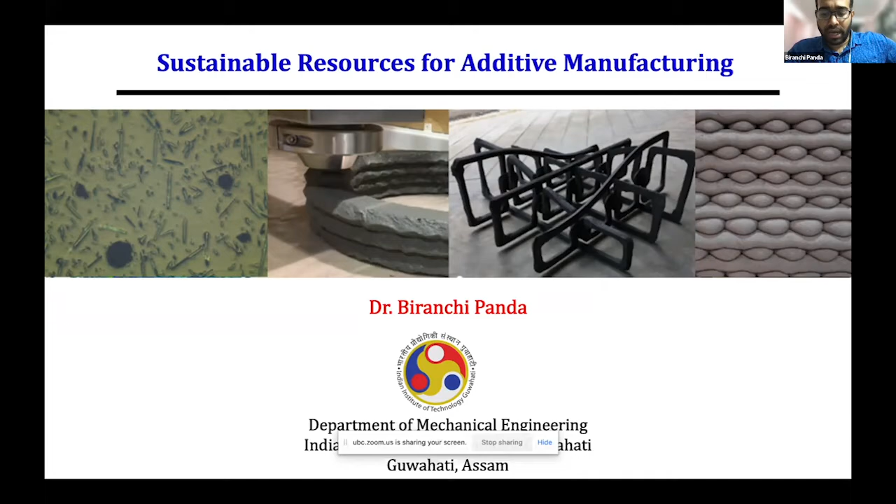Today I'm here to share some of the research activity being done at IIT Guwahati. I completed my PhD from Nanyang Technological University, Singapore, and just one year back I joined IIT Guwahati as an assistant professor. We do research on digital construction. You can see a robot printing some structures. Definitely we have much higher productivity compared to the traditional way of creating construction structures.

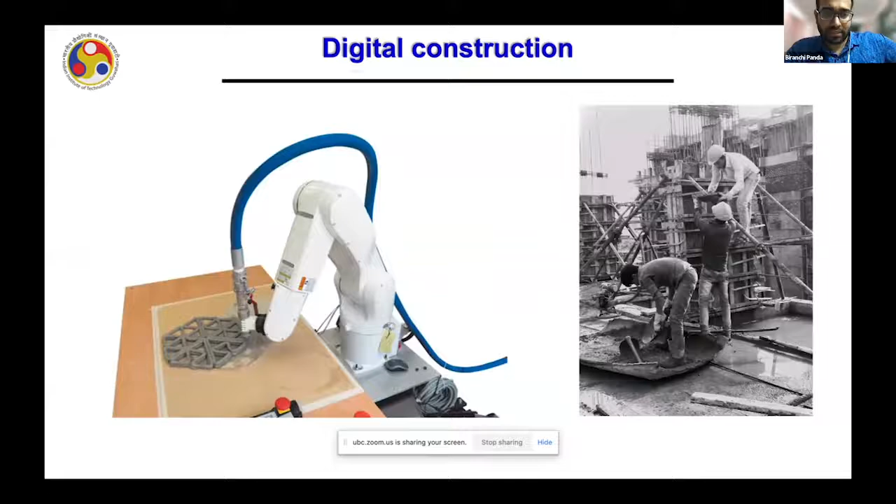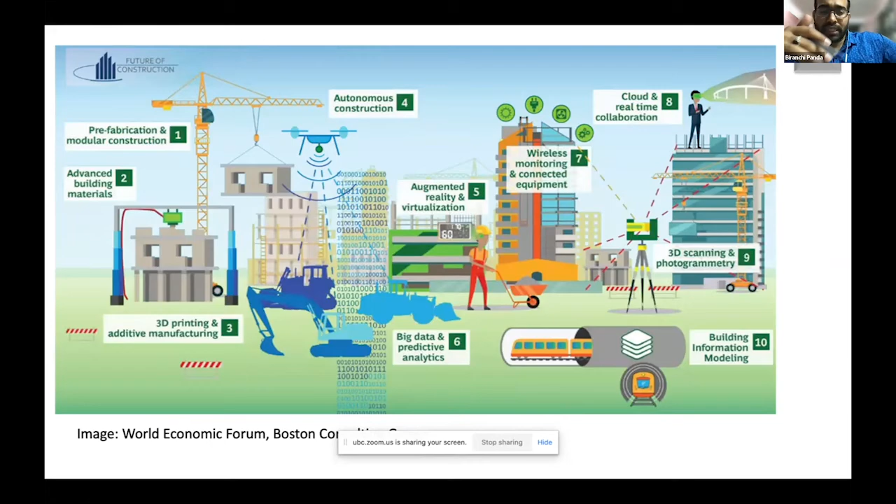In recent newspaper articles, I have seen that the World Economic Forum has also pointed out the need to automate our construction industry through various technologies like IoT and 3D printing. Different new technologies can be combined to automate our building process, so that the process can be faster and we can get more quality and robust components. There are different strategies under the umbrella of digital construction. 3D concrete printing is one technology getting a lot of attention from both academia and industry. In fact, when I joined in India, I got a lot of response from companies like JSW and JK Cement, who are very keen to invest in concrete printing projects.

When I look into concrete printing projects, I feel there is a huge need to understand the technological benefits. For me, I see the benefit in terms of design freedom. You can see an example of this kind of complicated geometry printed by a French company, XtreeE. You can imagine the degree of complexity achieved with the help of a 3D printer without the need for any mold.

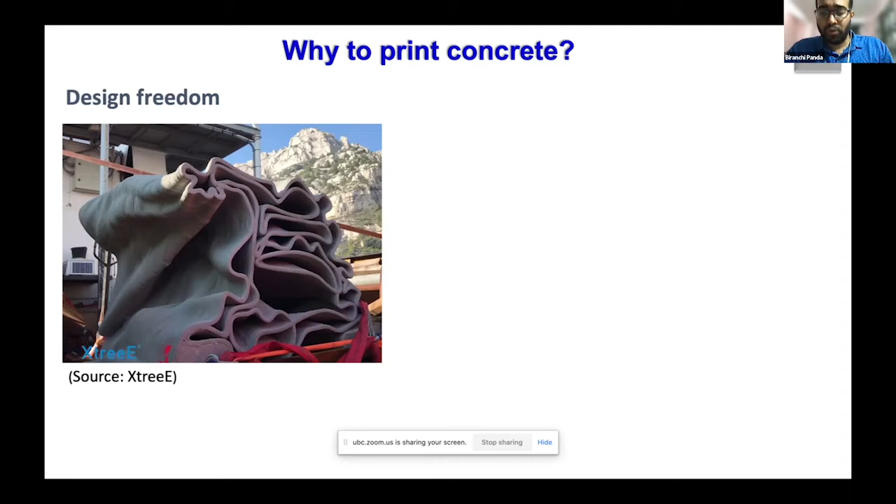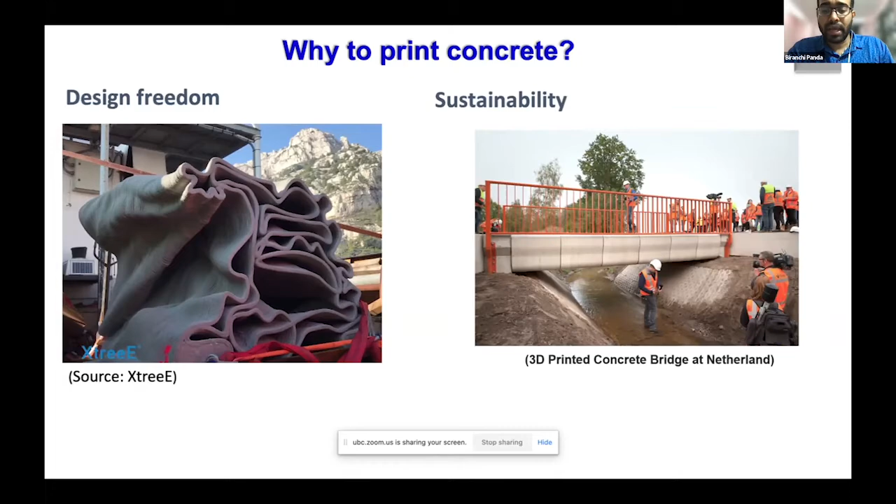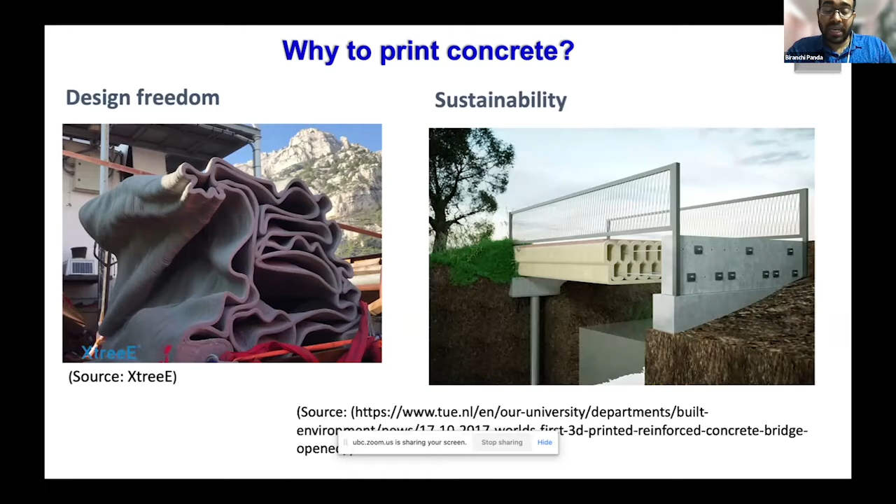Another benefit I see is sustainability. Definitely we can bring more sustainable materials to create such structures. But if you see this bridge, the entire cross-sectional area has been topologically optimized, and this work was done in the Netherlands. So through 3D printing we can also redesign our structures to minimize concrete waste, and thereby minimize the problems with the production of cement.

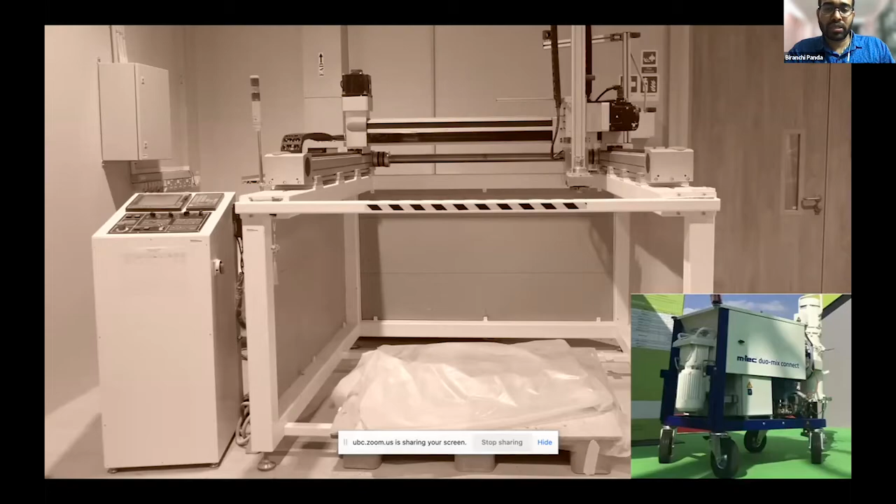So during my PhD, I was using two different types of machine. One you can see on my screen. It's more like a gantry-based system. So on the left-hand side, you can see a controller. We have a pump here. So we simply pump the materials to deposit it layer by layer. But it is a small-scale machine. Then we had a large-scale robotic printer, which we used to print a prefab bathroom unit. So I'm going to show you some of the videos later.

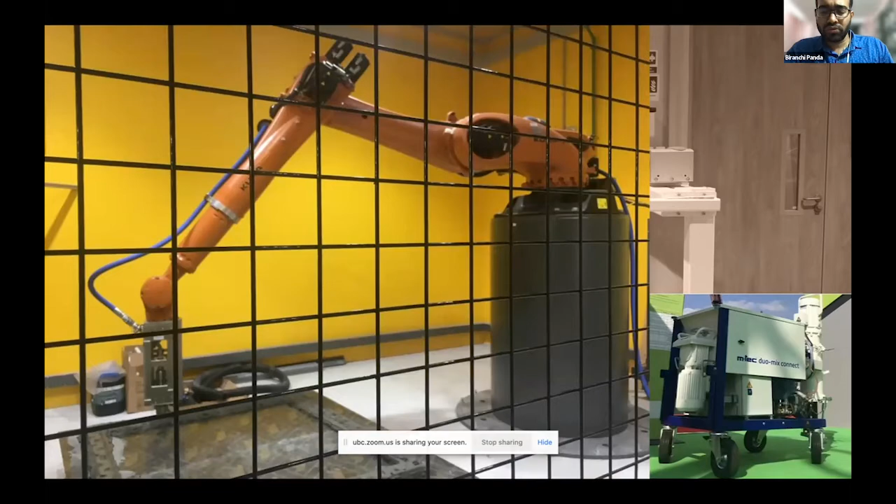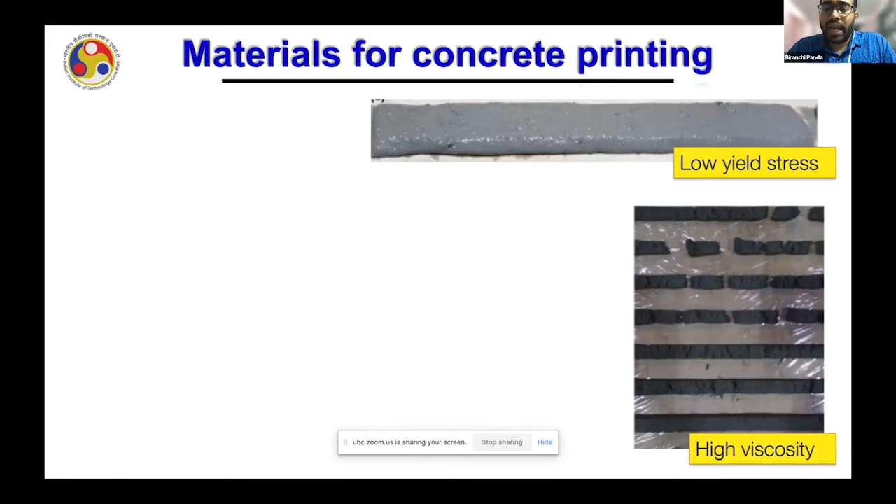So what I feel is that when we are talking about such a technology, it is very important for us as scientists to know what are the key factors that are important from a researcher's point of view to explore this window. So definitely materials are important. When we are dealing with materials for concrete printing, they have to be properly designed. We can't print a very fluid concrete because it's not going to take the shape. And if we make it more stiff, we can see some discontinuity in the layers during printing. So we need to properly balance the material rheology. So we have to bring a thixotropic kind of material which can be pumpable and printable.

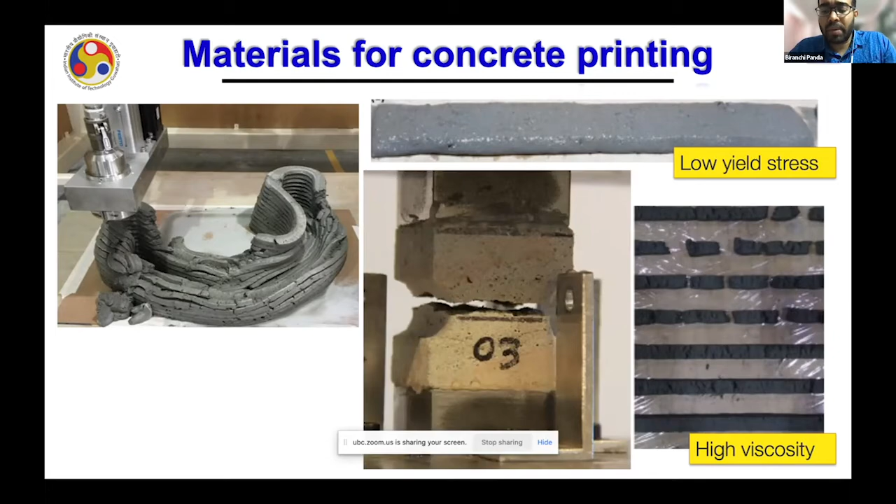And in this regard, when you are going for large-scale printing, such as when you want to print an entire home, then of course we need to take into account the structural build-up of the material. If that is poor, then definitely after printing a few layers, you are going to end up with structures which are going to collapse very soon. On the other hand, if you have a material with a very high structural build-up rate, then you are going to end up with poor interlayer bond strength. So it means that if we want to promote such kind of technology, we must have a proper material science background so that we can develop a proper material for such technology.

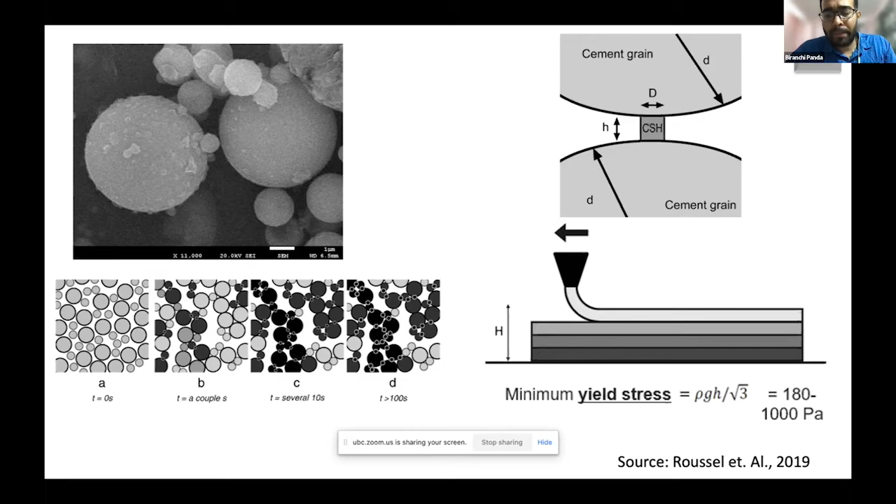Having said that, when we have the ordinary Portland cement, which is most commonly used everywhere these days, in India especially, you don't see any problem because we get some inherent thixotropy because of the cement particles. But if we want to promote sustainable materials like fly ash, or industrial waste like slag, so recently we are working with two or three different companies who are providing us these kinds of industrial byproducts, and we are trying to use them in the material formulation. So we see many challenges. For example, if you take fly ash, due to its spherical shape, we are not getting proper buildability, and therefore we have used some kind of nanomaterials.

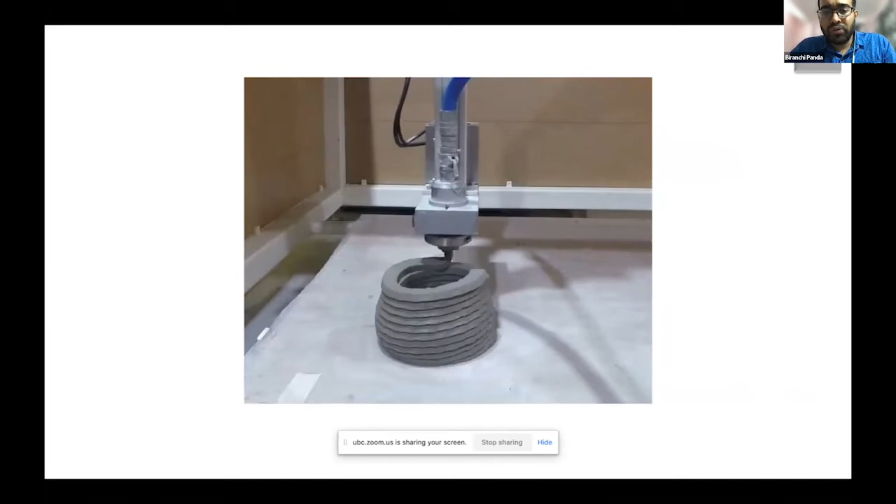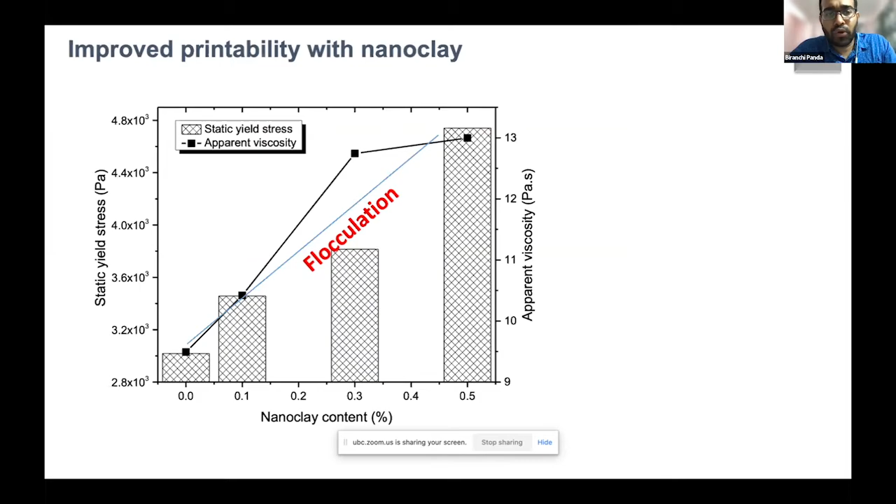So you can see that you are going to use a lot of fly ash in the material formulation, and if it is not properly designed, then you will see poor buildability after printing a few layers. So in this regard, what we did, we used nano clay powders, and we see that by the flocculation mechanism we have improved the buildability. And this buildability is all from the material side.

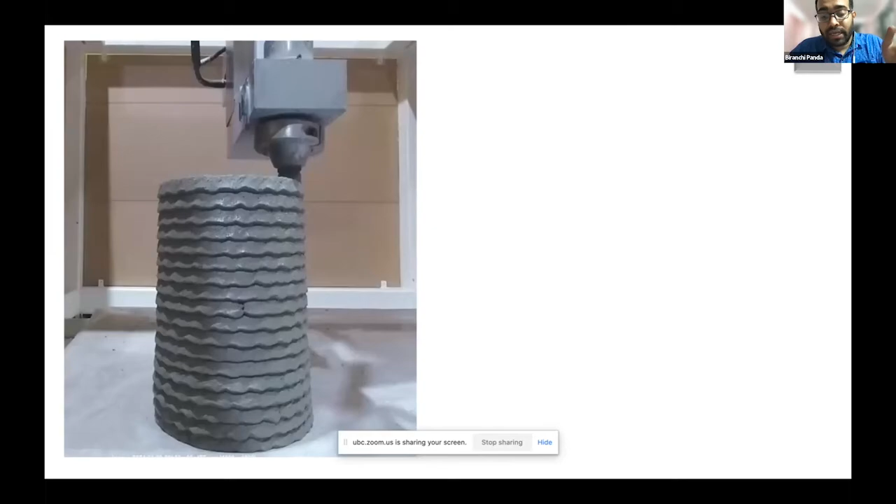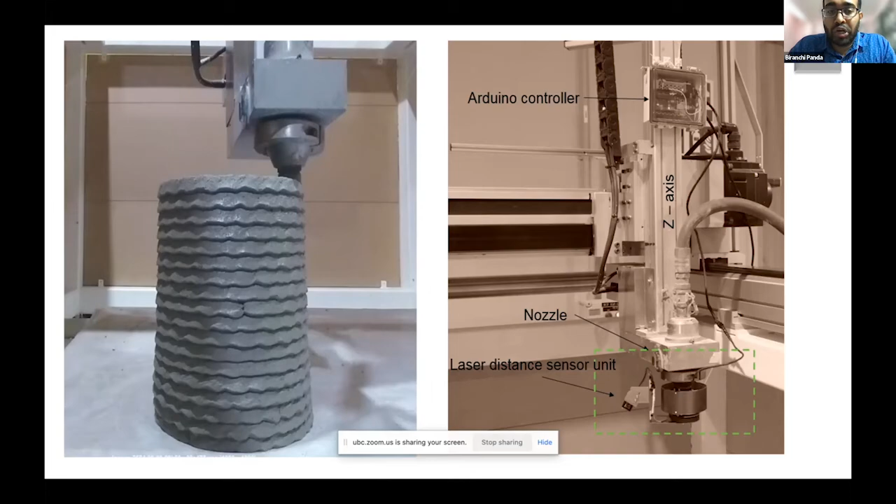So this is the story for the material, but we have also done some research on the machine side. During printing, we have added laser sensors to track the layer height deformation, and all this information we store in a cloud point database. And then with the help of an AI network, we have optimized the parameter settings so that during printing, if the system senses deformation, then the parameters are automatically adjusted so that you are not going to see any collapse during printing.

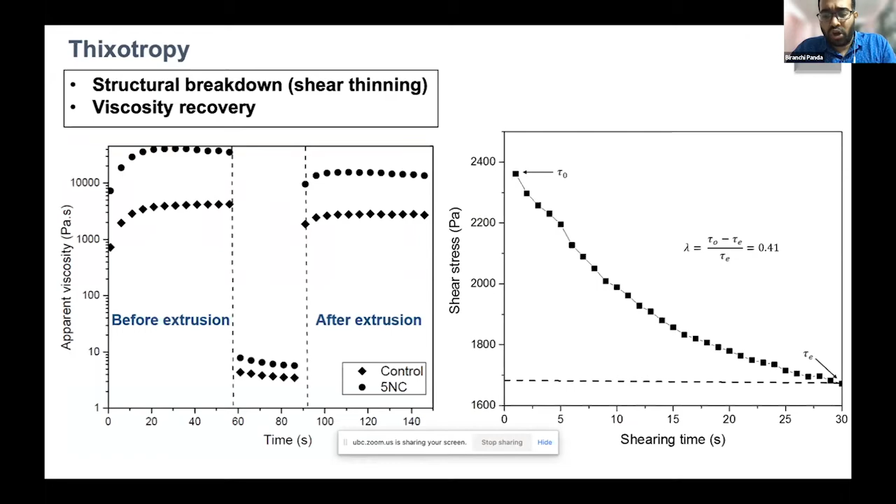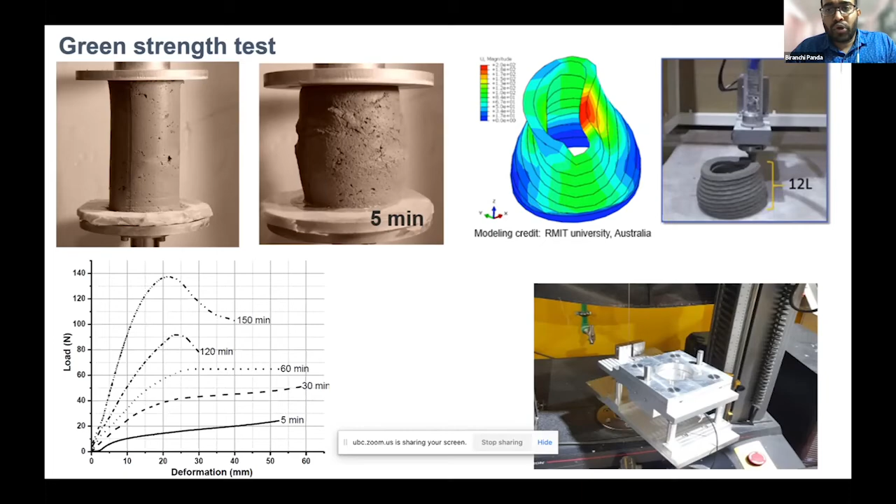So from the material point of view, we have done some thixotropy characterizations. I think it can be discussed in more materials-focused conferences. But having said that, it is very important to understand the material behavior during 3D printing. And we have done some characterization like a green strength test. And also with the help of advanced modeling, we try to understand the buildability of such materials, so that when we are going to print large-scale structures, we can easily see how the layers are going to fail.

So it is also important to understand the technological parameters of the machine. For example, if you are printing with a high-speed robotic 3D printer, then you must know what limitations you have from the robot design point of view. So we have seen that when printing at different speeds, we have different layer deformation.

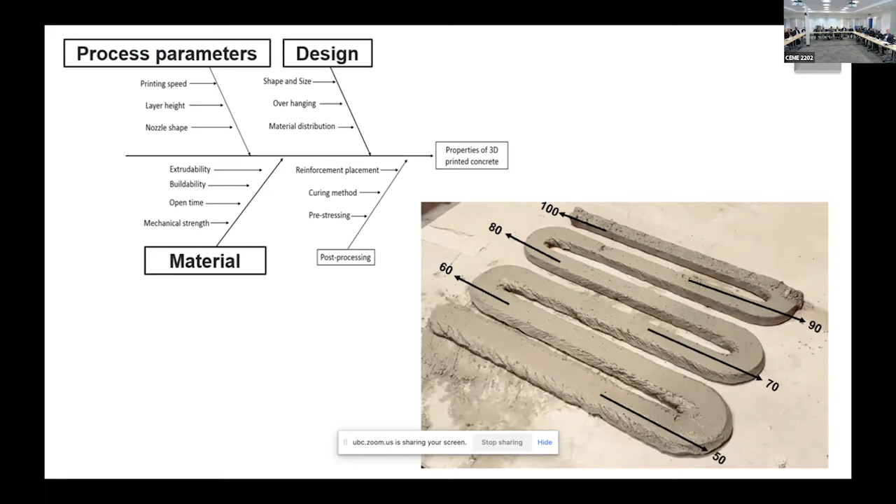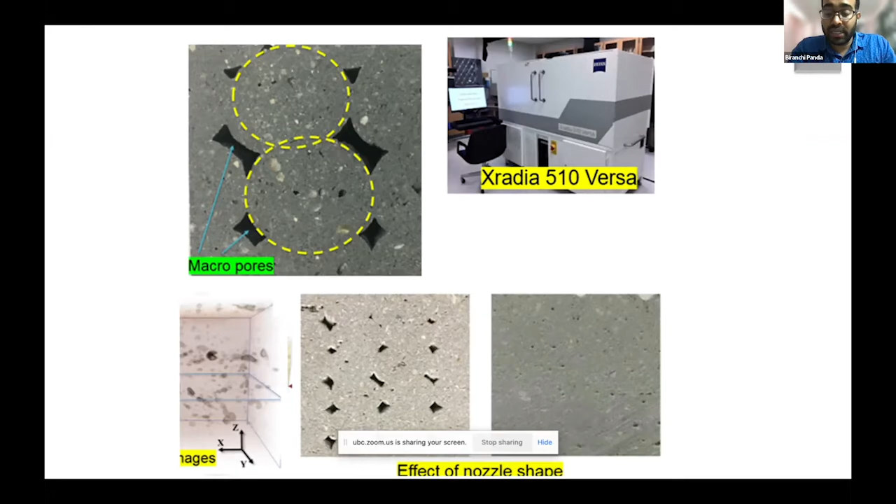We are not getting the exact layer shape we want, so we have to optimize the print speed. Apart from that, your printing nozzle diameter and shape also affect the robustness of the concrete you are making. So when recommending 3D printing for a home, it's important to understand proper details like robotic parameters, the nozzle you are using, and the materials you are having. All these things together affect your final structure's robustness.

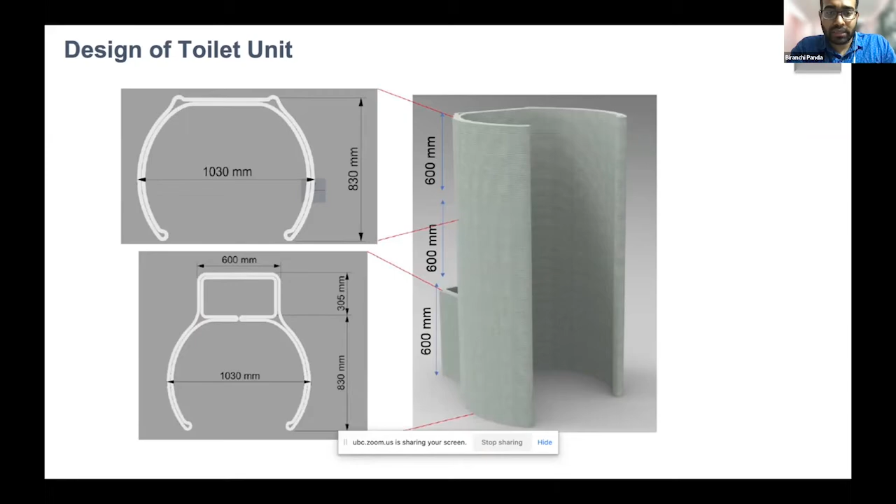Having this background knowledge, we started working on projects like toilet printing. I remember when I was in Singapore for World Toilet Day, we printed this toilet unit. During the design phase, we found it's very important for an architect to understand the constraints of 3D printing to better design a structure for such applications. When printing structures with curvature, we tried to optimize the parametric settings so we wouldn't get surface cracks during printing. It's an example of how you try material combinations and optimize print parameters to end up with proper robust printing.

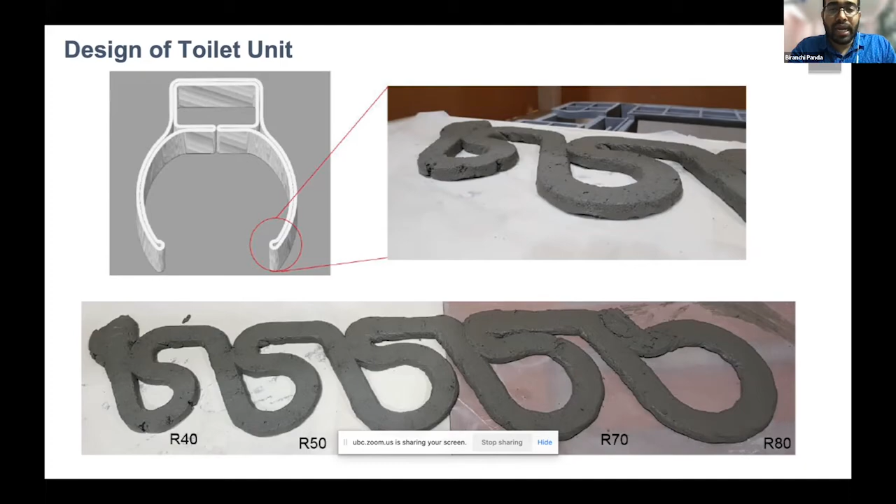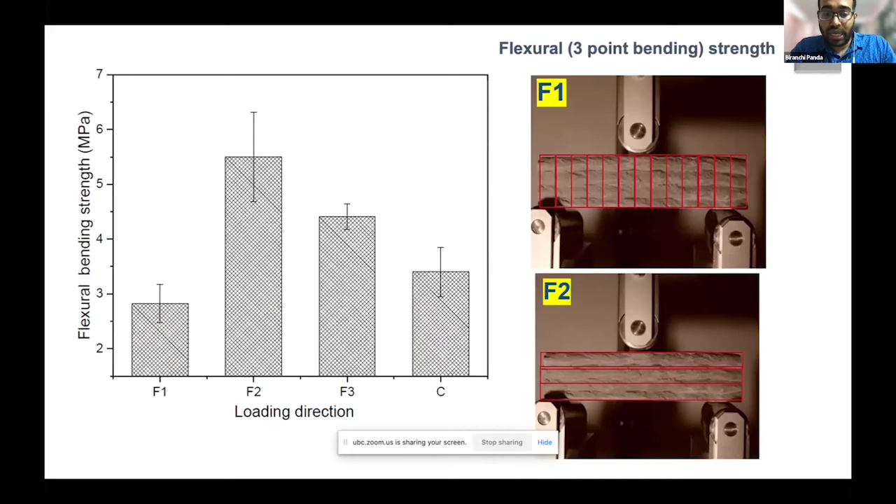With this background, we did our first step, and also did some strength testing to make sure whatever structure we're printing is robust. We did the flexural test and the bond test to find the optimum time gap between the layers. Once we had all the knowledge, we started printing the toilet unit.

I remember that day our Honorable Prime Minister Ji was there. We invited him to demonstrate the capability of this digital construction technology. He appreciated that this entire toilet unit was printed within 30 minutes.

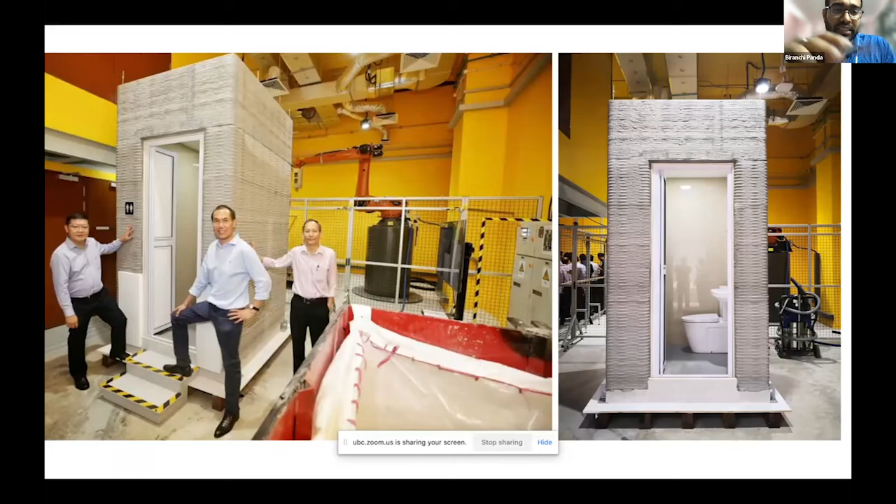Our next project was to print a prefab bathroom unit using the large scale robotic printer. You can see it's almost a 3.3 meter tall bathroom unit. With our sponsor Sembcorp, we planned to print the prefab unit completely using the large scale robotic setup. We printed the structure only, and after that went for several tests recommended by the Singapore Building Council, and we passed almost all of the tests.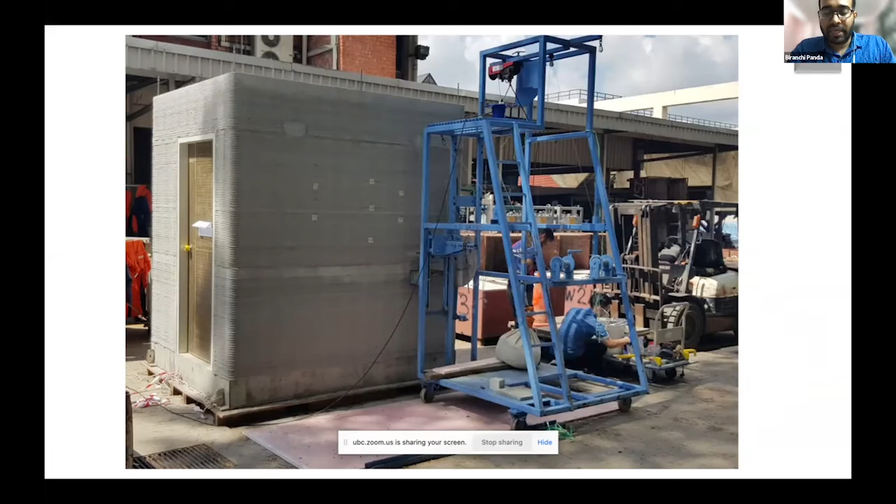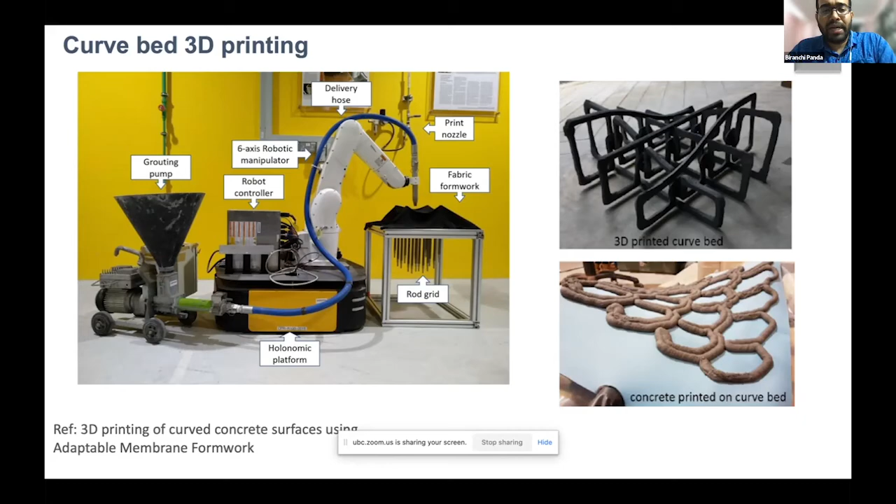Now we are at the stage to promote the technology to make prefab items so that prefab furnitures or similar structures can be directly installed during the entire house making process. We also have some small robots. Sometimes we do funny research like printing on a curved platform. The main idea was that printing these kinds of curved panels can be used as a facade in building applications.

Recently when I joined IIT Guwahati, we made our first 3D printer. It's a small 3D printer, but we developed our own materials to print lattice structures. We collaborated with two or three companies providing industry best practices to make the final material more sustainable. We are also discussing with companies to do the first ever on-site 3D printing of homes in India, and discussing with many companies for funding.

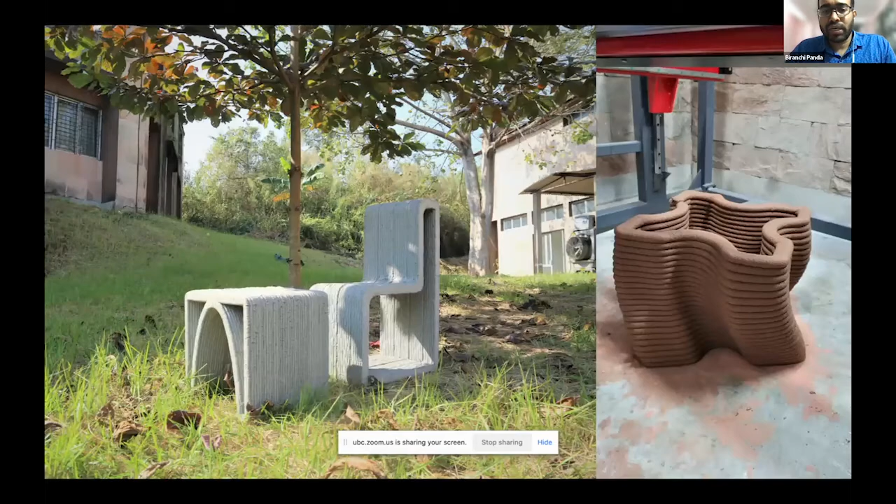Recently my students printed some furnitures to demonstrate the capability of the technology to create free-form designs. We are also making advanced nozzles where we can mix accelerator as well as different colors. If you want different colors for your building, that's also feasible with this digital technology. We can add different colors and patterns as you want in the 3D design.

I would like to thank the entire team involved in material development and printing. We are now looking into commercializing this technology, and also interested in doing on-site 3D printing of homes so the technology can be viable. We are also investigating cost analysis and durability of the material, which has not been properly studied in the literature. Hopefully with this knowledge from experts, our team, and other researchers, one day 3D printing can be an alternative option to create such large scale structures. With this, I would like to conclude my talk.

Thank you for your attention. If you have any questions, I'll be happy to discuss.

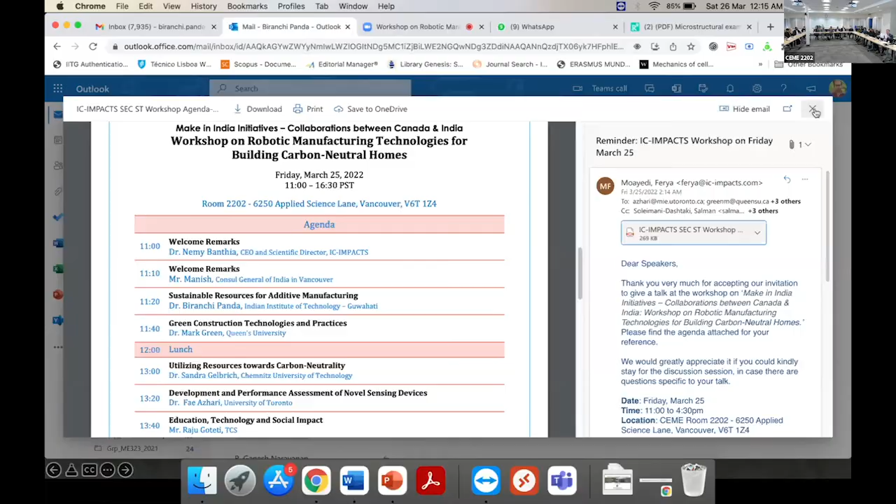Okay, great. So thank you for inviting me here today. And I see the title was appropriately picked for me with my last name in the start of the title.

I also want to acknowledge that I am here in Kingston and coming from the traditional territory of both the Haudenosaunee and the Anishinaabe peoples. And myself, I am a member of the Mohawks of the Bay of Quinte, and my Mohawk name is Raswaherha, and I sit with the Turtle Clan in Tyendinaga. Raswaherha actually means he builds a bridge, and I did get that name as part of my connection to civil engineering.

So I want to start by talking about some of the work I was involved with that was led through Queen's in sustainable engineering and remote areas. This was an NSERC CREATE program that involved 4 different universities: Queen's, University of Manitoba, Ottawa, and the Royal Military College. We looked at different technologies in 2 research themes, one in renewable energy, but also in sustainable buildings, looking at building in the north and some of those challenges.

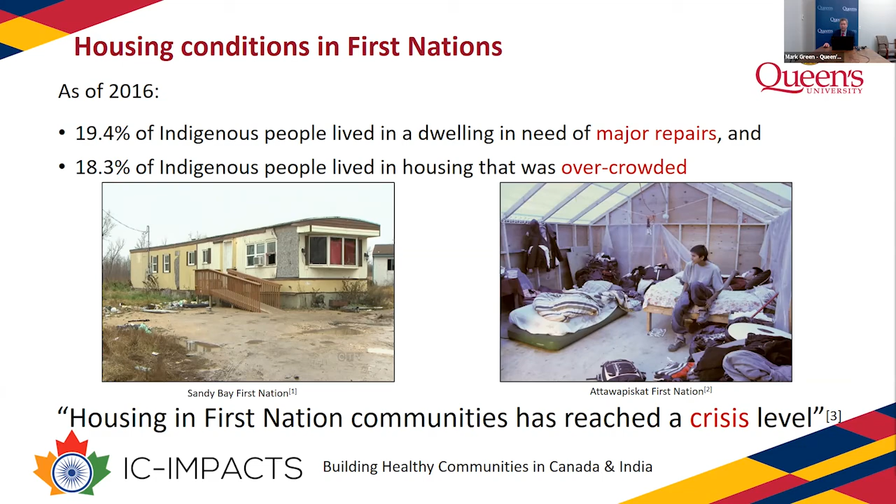So I mentioned earlier, and Dr. Banthia also talked about some of the housing conditions in First Nations. Some of these pictures and statistics look at the challenges in many communities—almost 1/5 of people in Indigenous communities live in houses that need major repairs or face overcrowding situations, such as you're seeing on the right. Certainly that has been identified as a crisis situation.

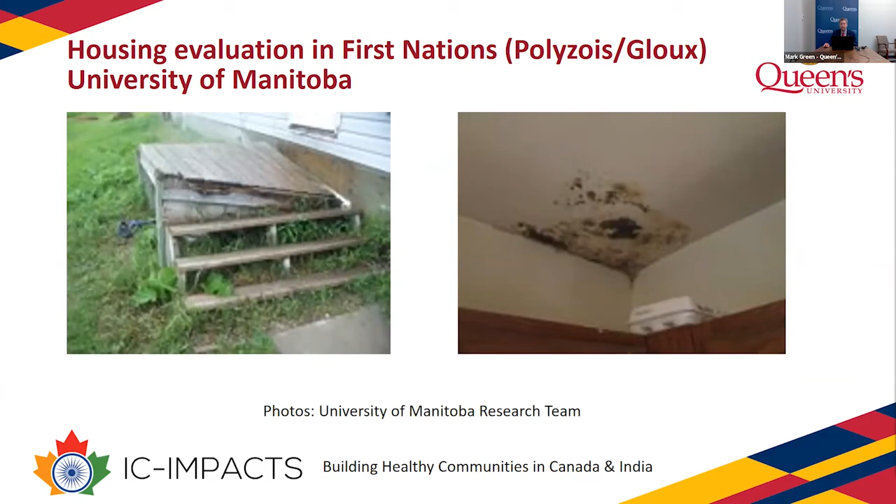And also when the research outcomes came out, they were very intentional to make certain that those results were provided to the communities first, looking at benefits to community.

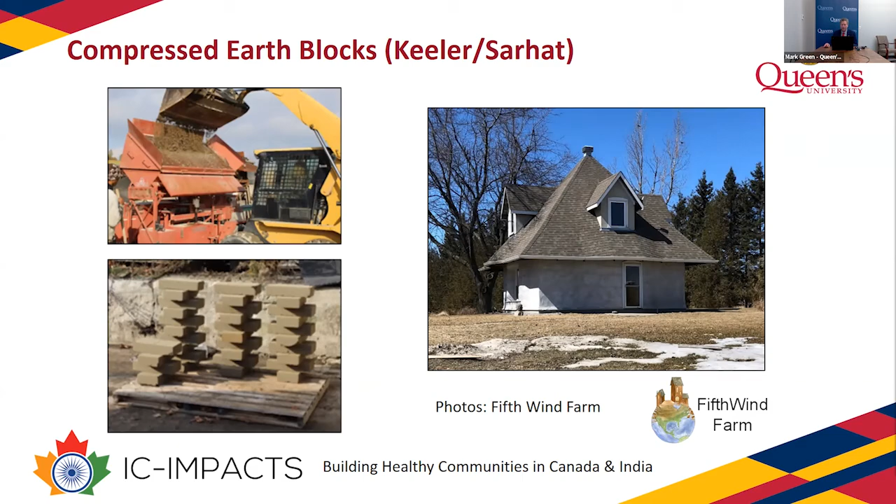I also want to talk about a couple of different technologies explored as part of the SERA program. One shown here is work done with postdoctoral fellow Saad Sarhat and master's student Emma Keeler on compressed earth blocks, showing the manufacture and homes built using local materials. This is probably getting far from robotic technologies, but it can be a good technology on site that uses on-site materials.

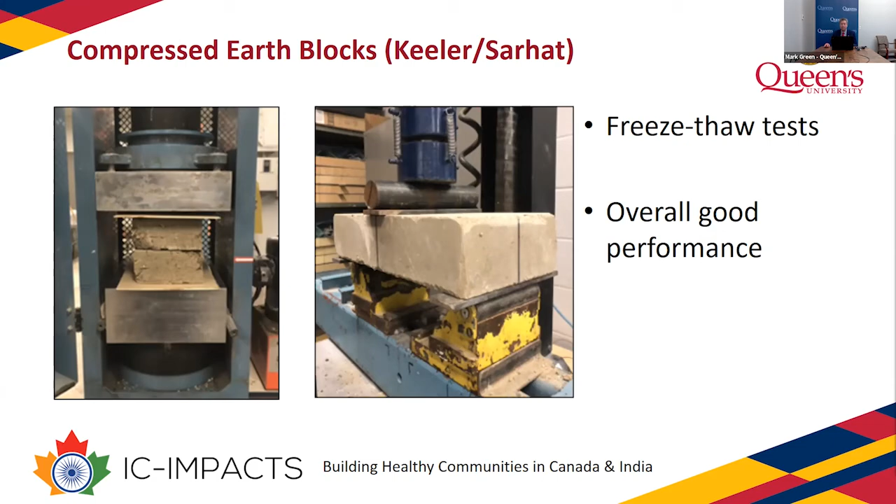One of the things we were looking at was evaluating freeze-thaw durability, testing both in compression and in flexure. Overall, we found quite good performance in those environments.

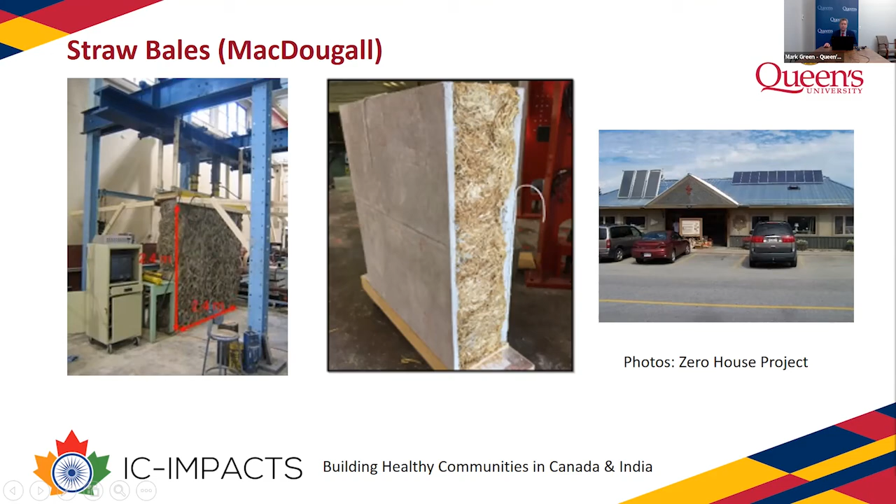Another area is my colleague Colin MacDougall, who has been looking at technologies using straw bales. You can see straw inside with plaster on the sides, evaluating structural performance. You can see the walls being tested here, and buildings produced with that. Further technologies for this Zero House project look at prefabricated systems incorporating similar technologies.

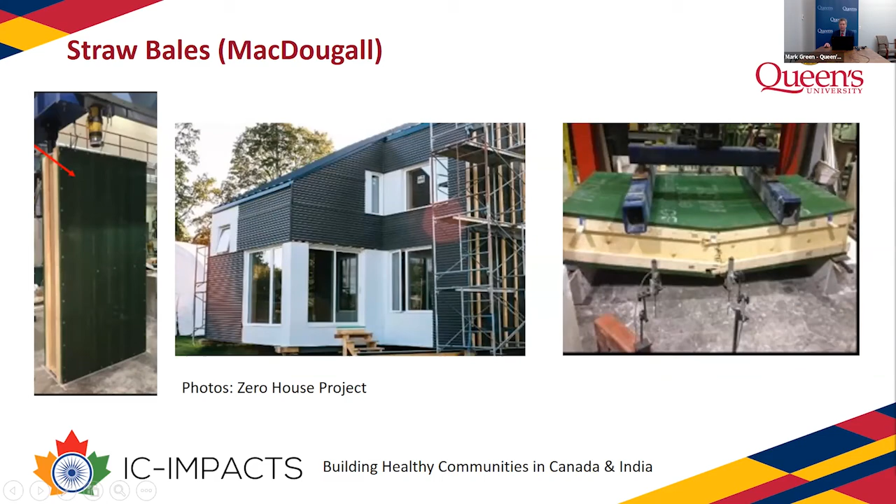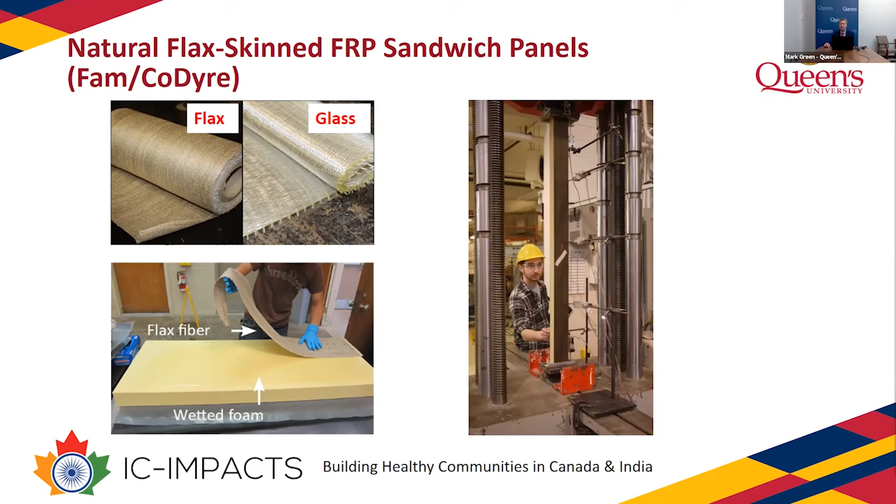Additionally, my colleague Amir Fam, together with graduate student Luke CoDyre, was looking at innovative sandwich panels using fiber reinforced polymers with natural fibers, evaluating flax against glass in this application, and testing performance as columns or walls.

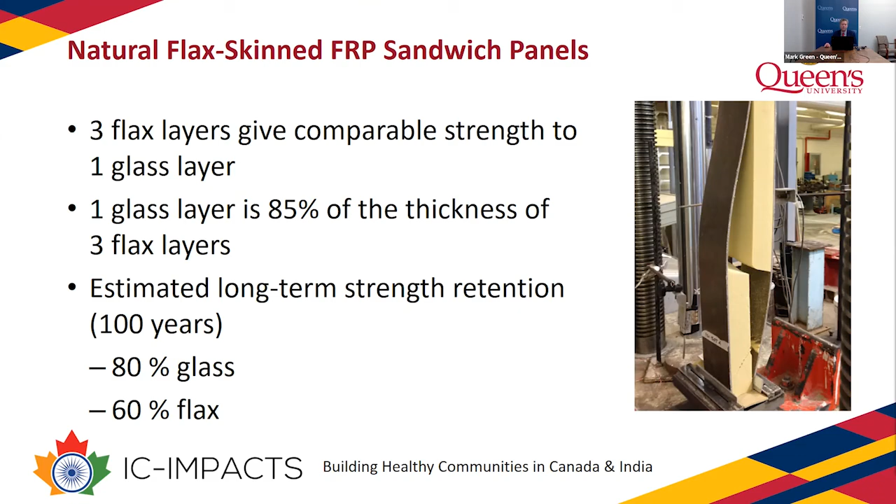They found that the structural effectiveness of 3 flax layers was comparable to 1 glass layer, though the glass layer was also approximately 85% of the thickness of the 3 flax layers. They also looked at long-term strength retention: at 100 years, glass retained 80%, and flax a bit lower at 60%, but still very promising for this technology.

Amir Fam and his group have also extended these ideas of wall panels into ultra-high performance concrete, double-wythe insulated panels. I've recently been working on a collaborative project to look at the fire performance of such structures, involving material testing, numerical modeling, and some full-scale testing.

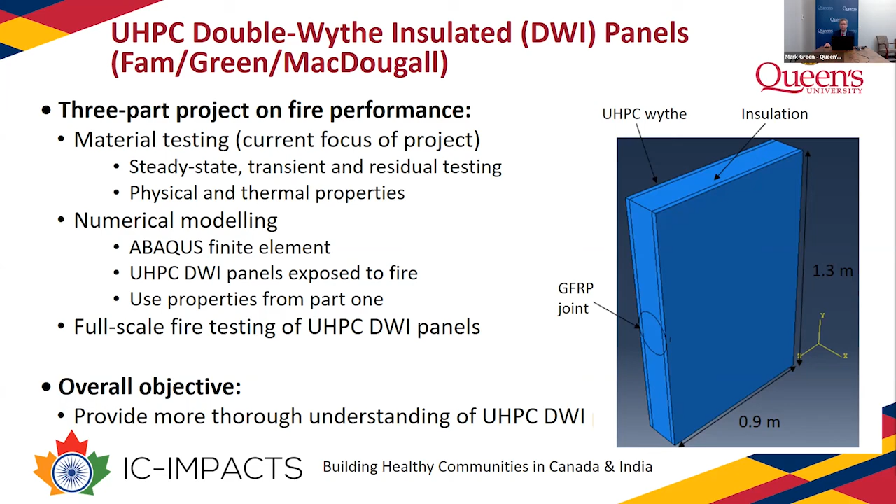Just to give a little overview, we've been making ultra-high performance cylinders for compression testing, and direct tensile testing specimens that we can insert into our high temperature testing machine shown here, to evaluate those structural parameters at high temperature so we can estimate what might happen in a fire scenario.

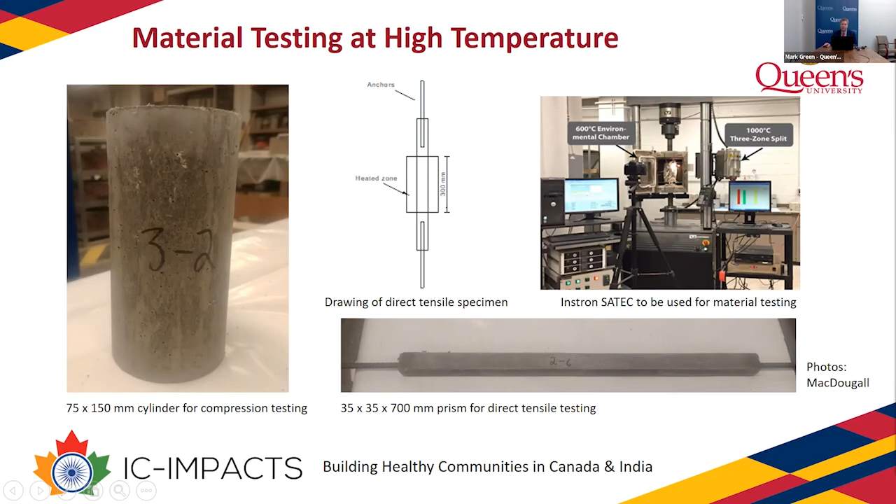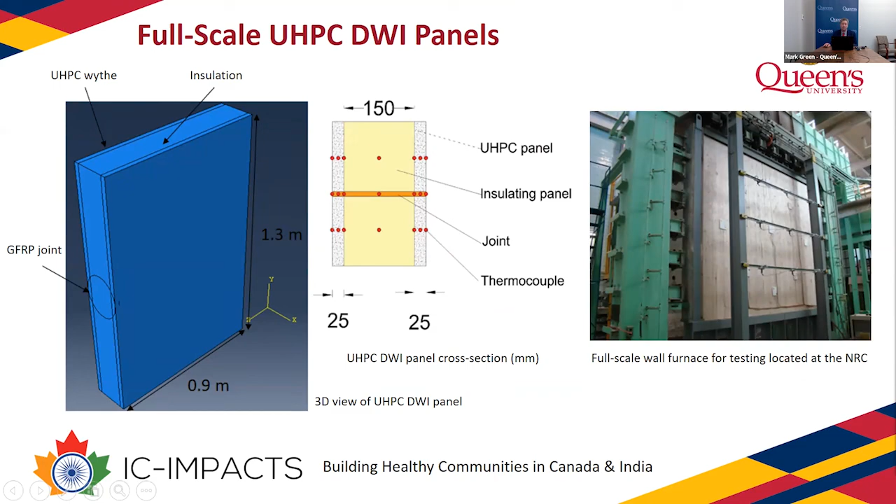Ultimately, after the material modeling, we are going to be doing tests in collaboration with the National Research Council in Ottawa, doing full-scale wall furnace tests. We're quite interested in the results that might come out of that.

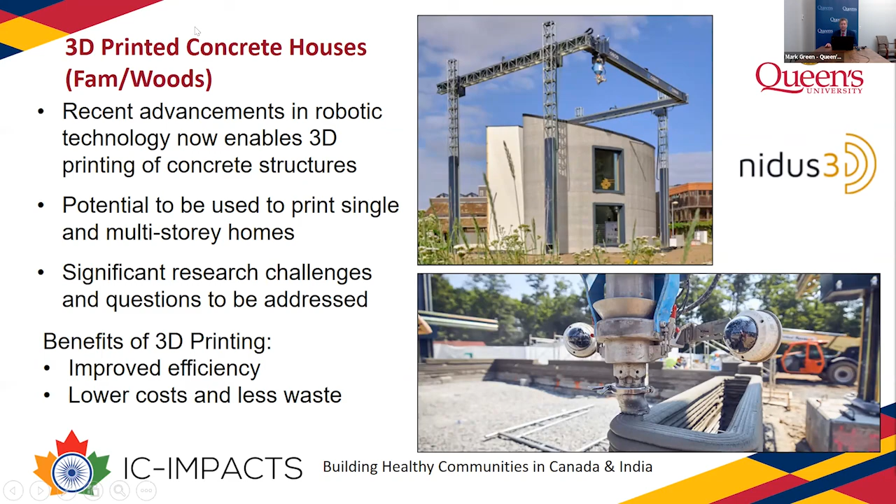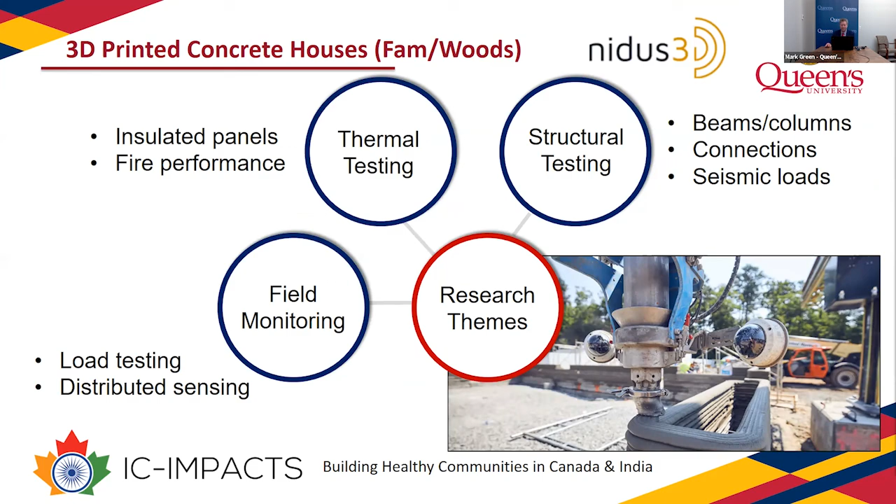In the theme of this workshop, we are also looking at Queen's entry into 3D printed concrete houses, championed by my two colleagues Amir Fam and the newest member of our structural team, Joshua Woods at Queen's, working with a company, nidus3D. We already had explanation of the benefits achieved through these technologies, and these are some ideas of various options for monitoring. Working with the company, we are looking for many options that will encompass many of our faculty members in civil engineering at Queen's and structures.

I just wanted to end with a few concluding thoughts. Housing is certainly a critical issue for First Nations communities. We really need to be intentional in engagement and partnership with First Nations communities for that to be successful. There are many different sustainable technologies available, and some of our recent work is starting on 3D printed concrete at Queen's. But what we really have to find, which will come with working with the communities, is what is the right fit and what do communities want. That will only come through meaningful engagement and dialogue.